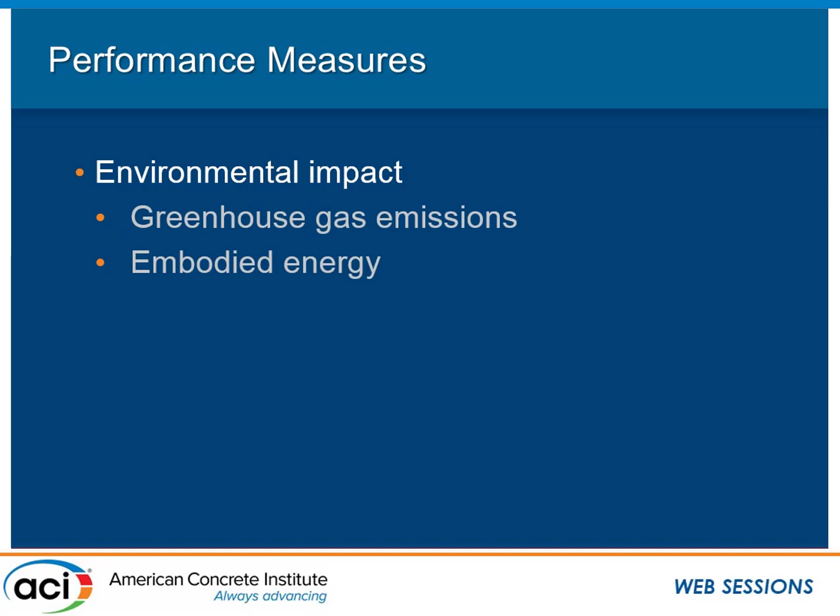Additionally, many of these cements are made primarily with waste materials, fly ash or slag, etc., materials that don't usually have a carbon footprint associated with them to start with.

So when we look at alternative cements, not only are we looking at the environmental impact, but we're also looking at the life cycle cost. One of the talks earlier talked about looking at the entire durability, the longevity of a material, eliminating the need for maintenance or replacement, that kind of thing. And then you do start to kind of link those two things to sustainability.

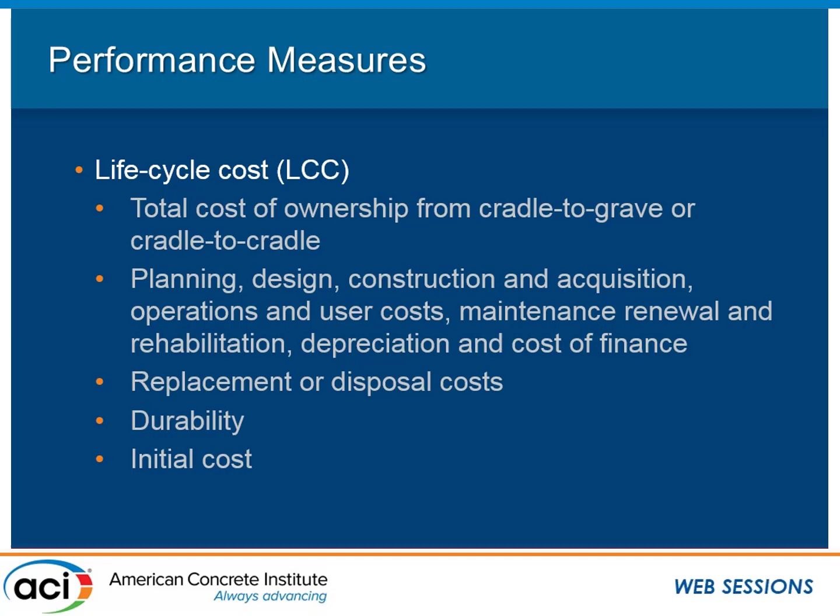And then alternative cements, I think many people think that an alternative cement means you would completely replace Portland cement concrete with this other new concrete. There are a couple alternative cements that could potentially play at that level, but many of them are very specific to unique properties that they have, and so they would be more application-based versus just a blanket switcheroo of Portland cement concrete with this new cement.

So looking at some of the unique properties offers new materials that could potentially outperform Portland cement in specific applications.

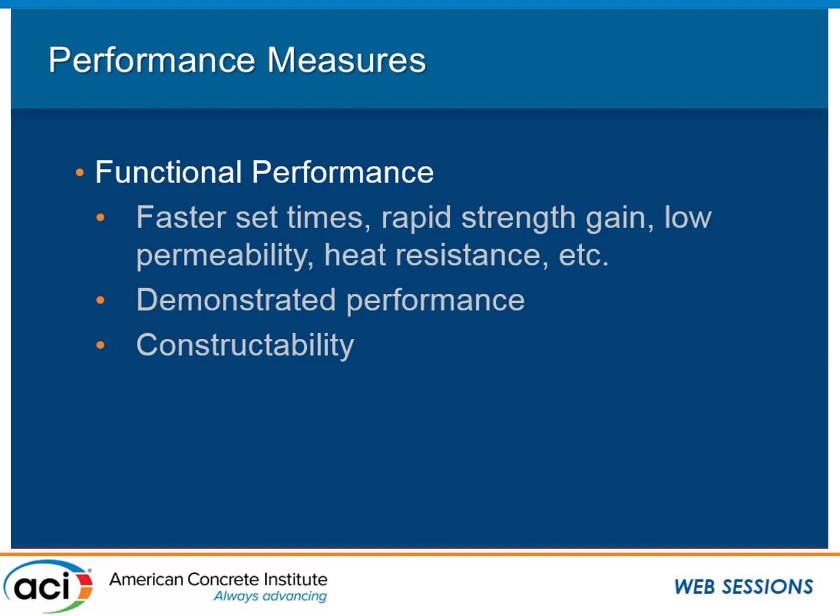Just to give a little bit of background, Dr. Sutter, Dr. Hooton, I think there's about 10 of us that were on an ITG for the last 5 years or so on alternative cements. And we recently became a committee. This is our second convention, I guess, as a committee on alternative cements.

And so we just came out with a couple of documents, and this presentation kind of follows the document, and I'll say a little bit more about it at the end, but if you do have more questions about specific cements, I would hope that you would go read those, because we spent a long time writing them, as you all know.

So the definition, which we went around in circles for a long time, is how do you define an alternative cement? It's kind of hard, like it doesn't seem like it would be that hard, right? But it's like, well, it's not a Portland cement, it's not a blended cement, it's not a supplementary cementitious material.

And so this is the definition that we have right now, and as a committee we'll revisit this, of course. But an alternative cement is an inorganic cement that can be used as a complete replacement for Portland or blended hydraulic cements, that is not covered by applicable specifications for Portland or blended hydraulic cements. So we're not really looking at binders where your base is a Portland cement binder and you're replacing part of it with something else. We're looking at a whole switch.

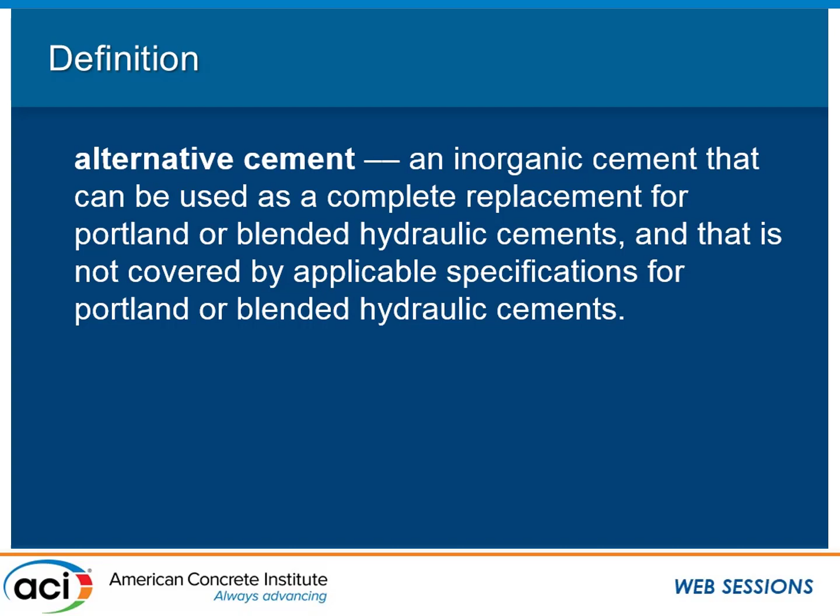And the way that we've classified these alternative cements is into three different categories: clinkered alternative cements, calcined alternative cements, and non-clinkered alternative cements. I'll go through each one and give a couple of examples.

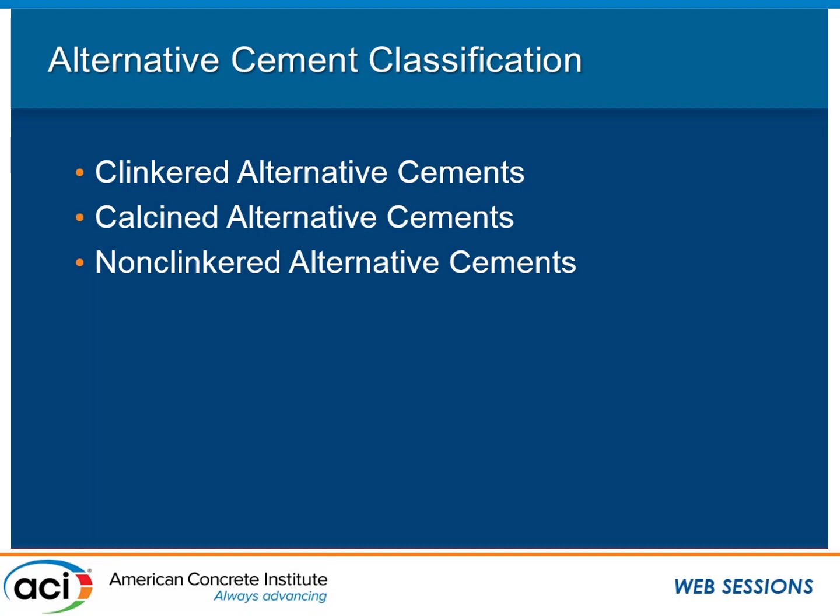Clinkered alternative cements are those cements that are made similarly to Portland cement. They might go through some sort of calcination process, but there's some sort of change. As a task group, we identified the types of cements that are emerging or have been used in the past, and then identified further the ones that we have good data on.

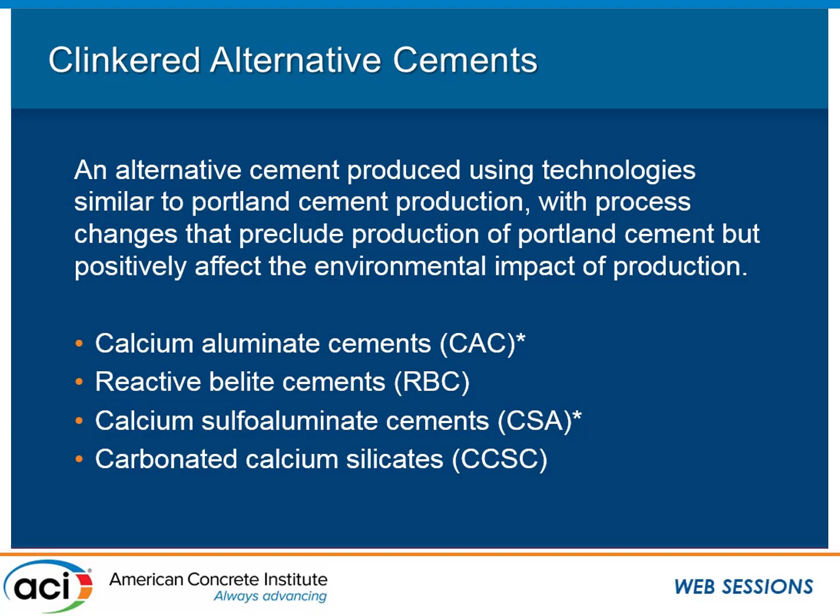In this category, calcium aluminate cements and calcium sulfoaluminate cements are the two that have come to the surface. Calcium aluminate cements have a very rapid set compared to Portland cement, similar strength, typically used as a repair material. You're not going to build a building out of calcium aluminate cements, but it's used for airport runway repair, things like that.

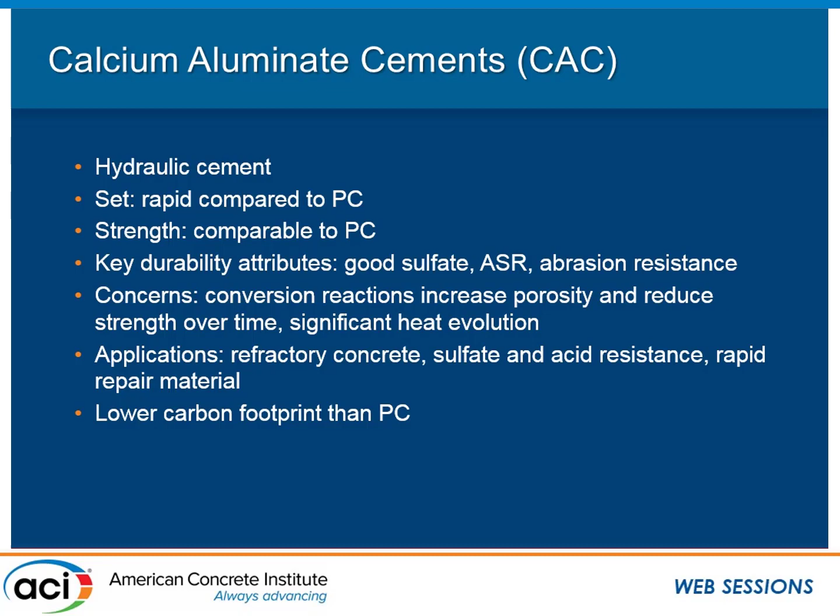There can be some issues with conversion from unstable phases to more stable phases, but researchers have figured out ways to handle that. It has a lower carbon footprint typically than Portland cement.

Calcium sulfoaluminate cements could be more of a direct replacement for Portland cement concrete, typically with a more rapid set. It can be expansive sometimes. Corrosion resistance can be an issue, and sometimes the pH is lower.

Calcium sulfoaluminate cement is essentially a reactive belite cement. Normal Portland cement has lots of alite. If you lower the clinkering temperature, you would stop when you start to get the belite, and then sulfoaluminate is added in to get a little bit higher early strength.

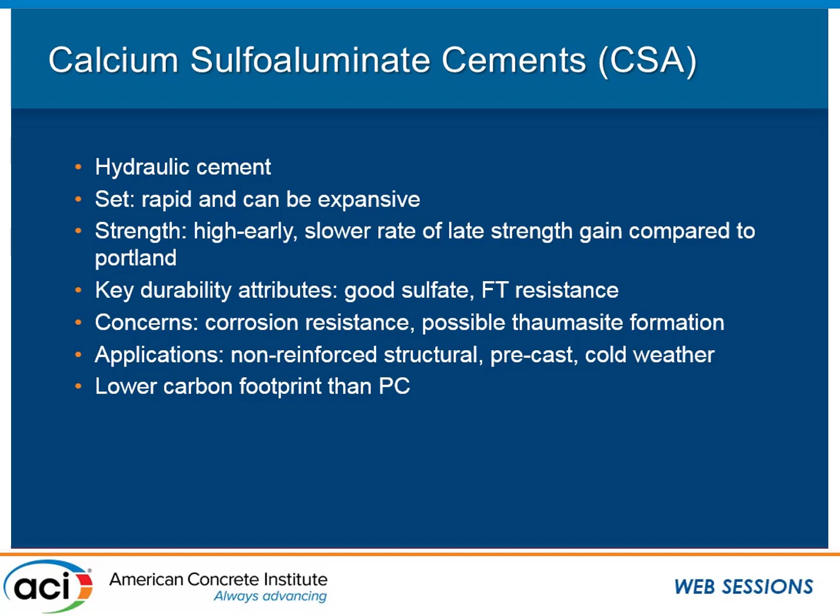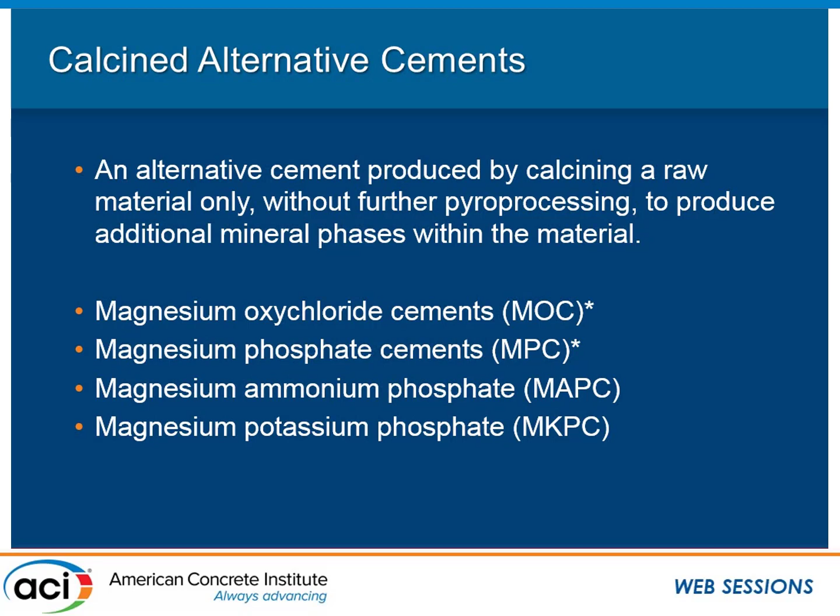So another good cement. Calcined alternative cements, we're looking mostly at magnesium-based binders: magnesium oxychloride cement, where magnesia and magnesium chloride are combined with water, and you end up with a really good patching material. There are some issues losing strength when it gets wet early on, but good fire abrasion and ASR freeze-thaw resistance.

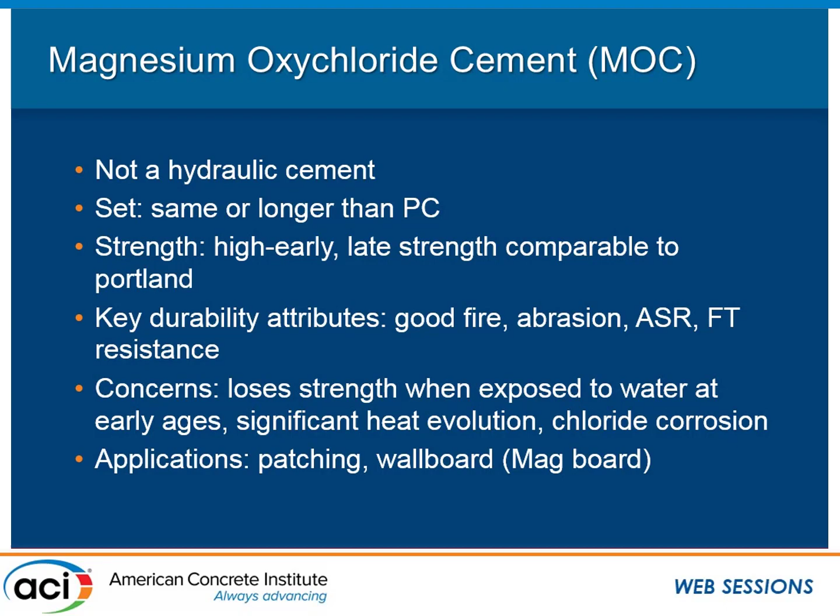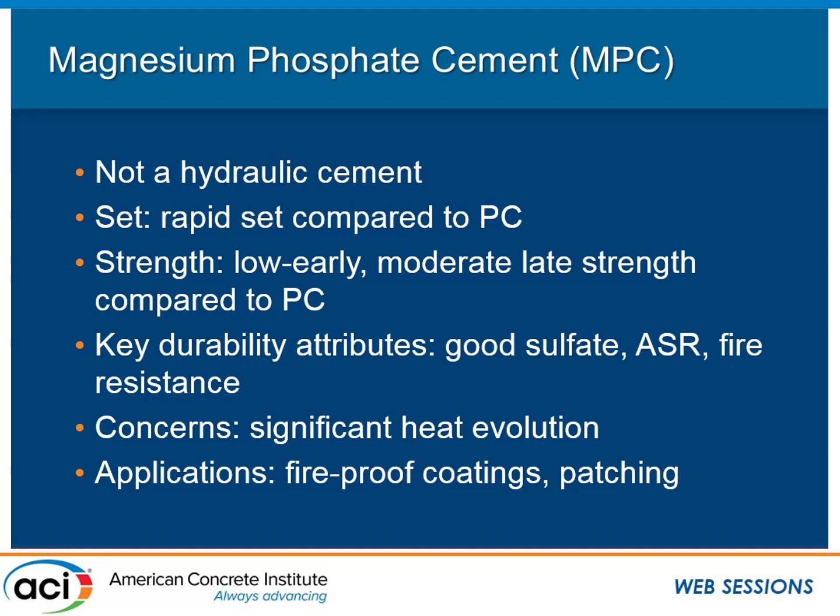Magnesium phosphate cement is similar to MOC, except in this case phosphate has been the acid that's been added. It has a very rapid set compared to Portland cement, often used for patching. A lot of these cements are very specific to certain applications.

The third category we looked at were non-clinkered alternative cements, which we defined as cements that require no pyroprocessing but need some sort of an activator to react. In this case we're mostly looking at alkali-activated materials.

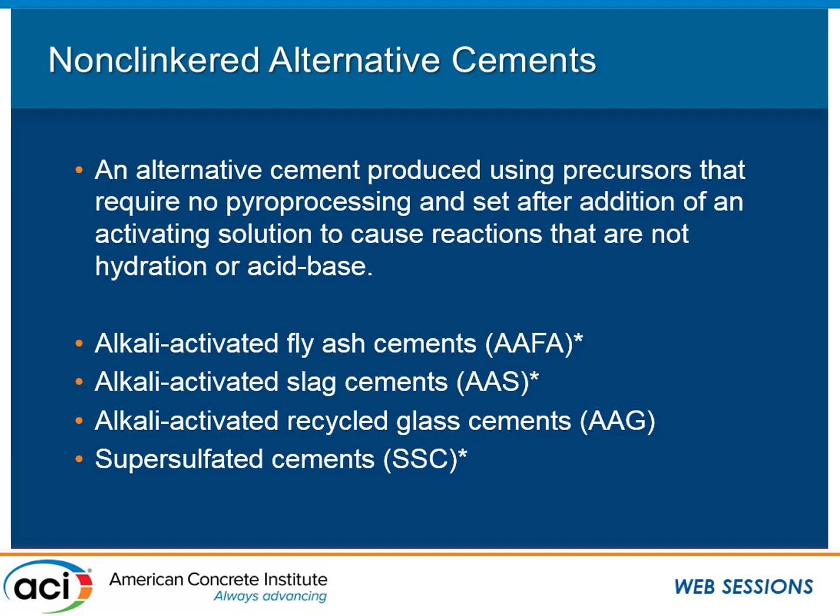Fly ash and slag, glass is an emerging material, and then supersulfated cements. Alkali-activated cements are sort of the umbrella category, and depending on the composition of the material that you're activating, you often hear the term geopolymers.

If you have a low calcium material such as a class F ash or glass, you might call that a geopolymer. If you're activating a slag or a class C ash, you might still just call that an alkali-activated cement. But these are not hydraulic cements, and can have a rapid set.

As we all know, when you're looking at high volumes of fly ash, slag, or glass, the composition of that material has a huge impact on their performance. If you have a class F ash or a class C ash, you're going to get a whole different material.

But anyway, the fly ash source does matter a lot. I would say fly ash geopolymers are probably the material that you hear most commonly directly compared to Portland cement concrete.

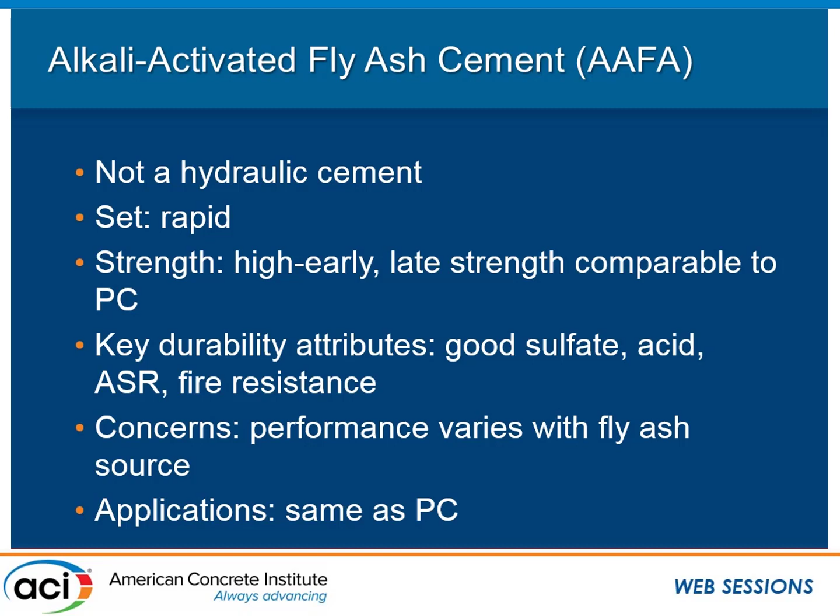Alkali-activated slag: slag typically has more calcium than fly ash or class F fly ash, where you need to consider the amount of calcium when you look at what kind of activator you would use. For those unfamiliar with alkali-activated cements, essentially you take a material rich in silica and alumina, ideally amorphous, and react it with a high pH activator, such as sodium hydroxide, potassium hydroxide, or sodium silicate.

It sort of pulls it apart and polymerizes it back together, kind of like Jello. You can do this with a very wide variety of materials. Essentially anything you would want to, you can use natural pozzolans, pretty much any pozzolan that's out there, but you will get, like I said, different properties.

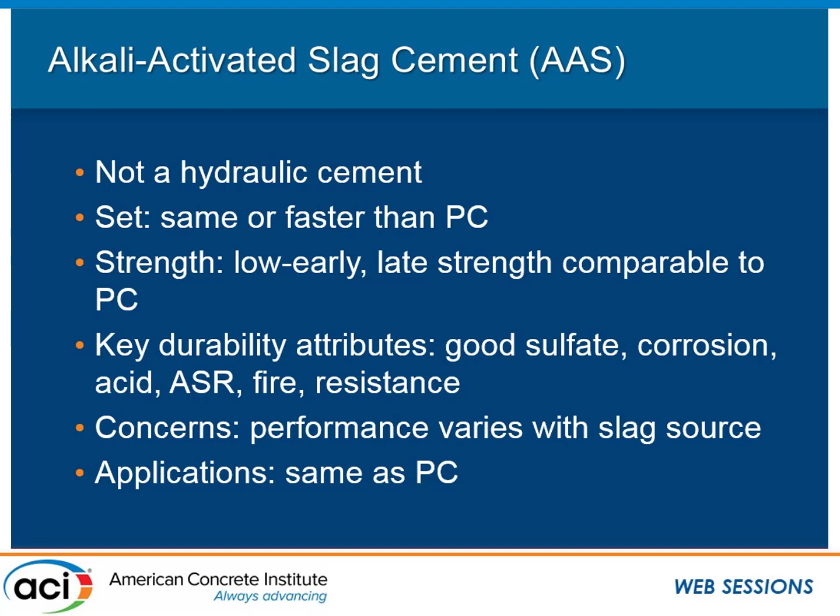One of the other things about alkali-activated cements is that they do require, in many cases, a heat cure. If you mix it up and set it on a table, nothing's going to happen. But if you put it in the oven for 24 hours, you might get up to 8,000 psi in one day, no problem. That is a limiting factor right now, but applications like precast could be a good place for that. So again, performance varies.

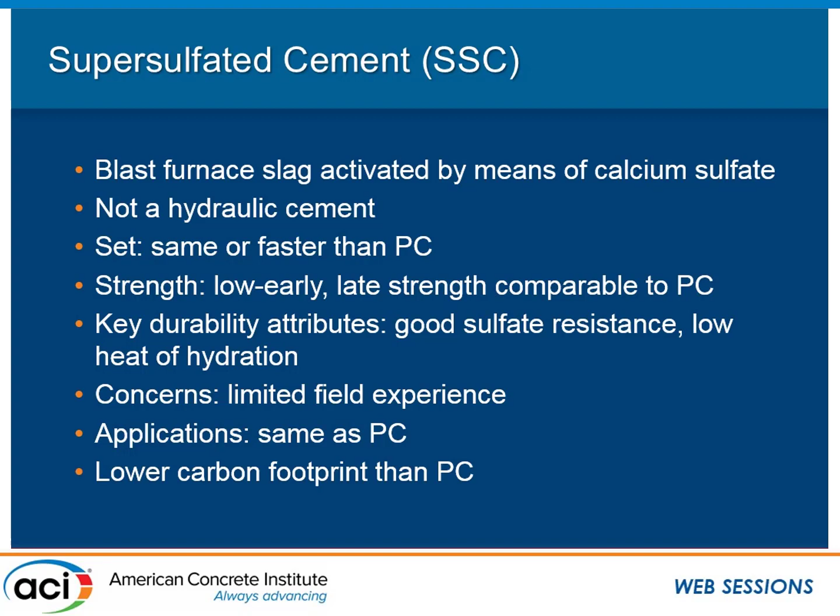Supersulfated cement is essentially blast furnace slag that's been activated with calcium sulfate. So there's some anhydrite and Portland cement added to the slag, and there's a little less knowledge about this cement than some of the others, but it does have good durability attributes, sulfate resistance, low heat of hydration, etc.

If you'd like more information about any of these, we have a really good resource right now to give you a heads up on the chemistry. I didn't go very deep at all, but the chemistry involved in the formation of a lot of these cements is extremely different from Portland cement hydration.

So there's kind of a learning curve when you're looking at a new cement, but the benefits can be pretty significant. If you're interested in alternative cements, there's a lot of research to be done. One problem is that most of our testing specifications and standards are written for Portland cement, and many alternative cements require a heat cure or a basic change in formation that would exclude them from whatever that test is. So there's a need to learn more about how these cements work, and also how to test them and compare them against each other.

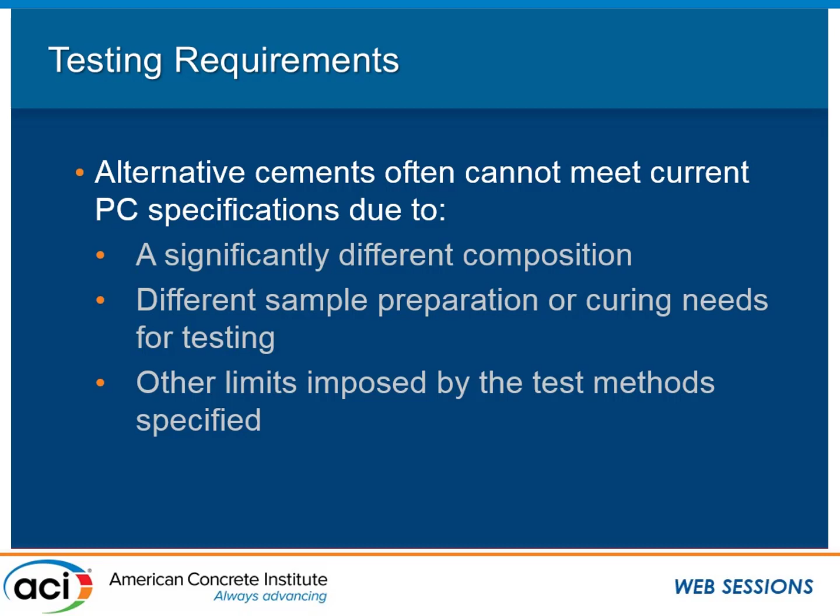Specific mixing procedures and curing are two of the main issues. One of the goals of the committee and of the document was to take note of what cements are out there, what they can do, how they work, and what needs to be done in order to help you use them.

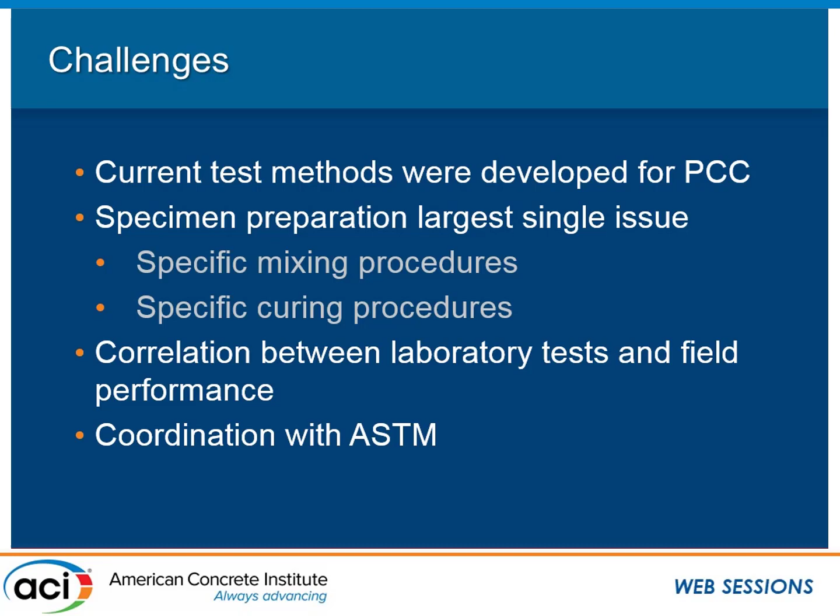The report on alternative cements goes through background and drivers, why we're looking at alternative cements, compares it a bit to Portland cement as a control, goes through technical information on all the cements I mentioned earlier, and gives a pretty good overview of current testing requirements for a wide variety of properties, and which cements they don't work for.

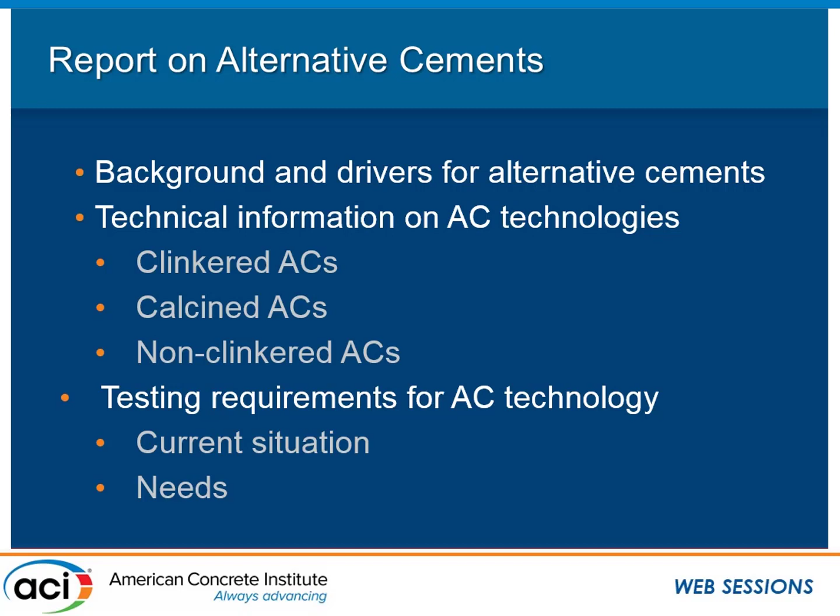If you're looking for research, there's a whole lot to be done. We also came out with another document called the Practitioner's Guide, aimed more at users. So if you're interested in calcium aluminate cements, you've heard about them, heard what they can do, but maybe don't know how to use them, the Practitioner's Guide doesn't necessarily say how to mix one, but it says what kind of questions you should ask someone who's going to be producing that for you.

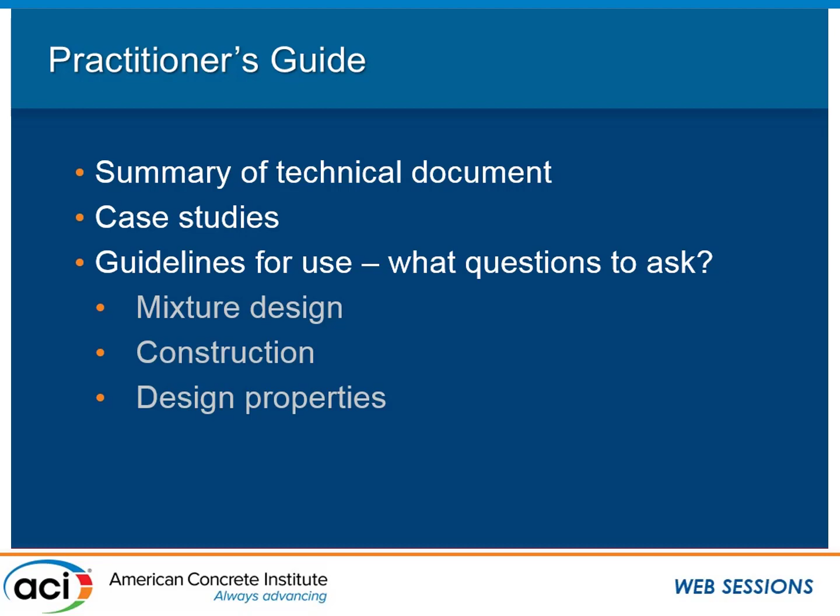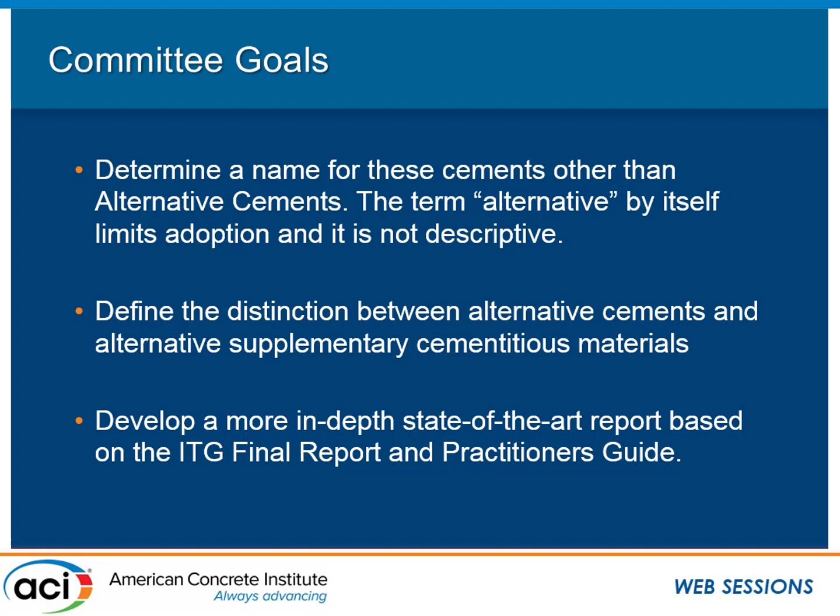So there's some pretty awesome materials out there. I think it's just a matter of communication and learning, and accepting that it's a lot of different new chemistries. Some of the committee's goals are to be a nucleus for all of this information, since there are a lot of different cements out there and they're all very different.